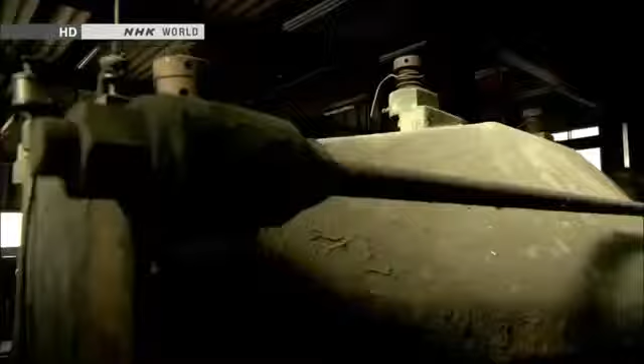In a workshop near Mount Fuji, a curious being has appeared. It's 3.8 meters tall and weighs 4 tons. It is a giant humanoid robot named Kuratas.

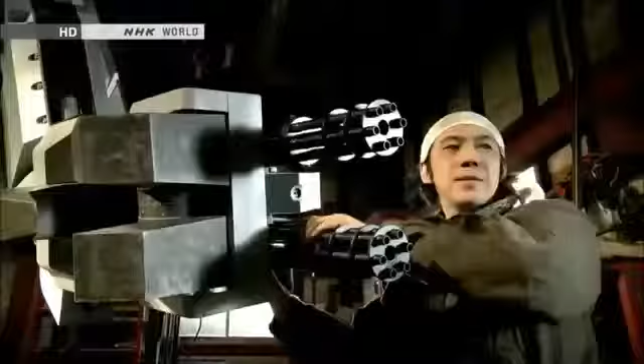Kuratas is a contemporary artist's creation. He holed up here for 2 years, building the robot with input from an expert.

He calls Kuratas a work of art, but it's a sophisticated piece of machinery. A person seated inside can control the robot, move its limbs, and grab things.

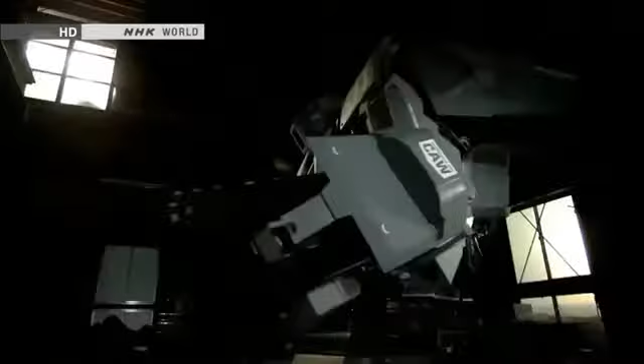The artist says he was inspired by robots in science fiction tales and animation. That vision sustained him as he worked in solitude.

Things that were once unthinkable are becoming real. How will robots evolve? Well, military applications could be one option. They'll probably become more and more like humans. They could surpass us in strength and ability.

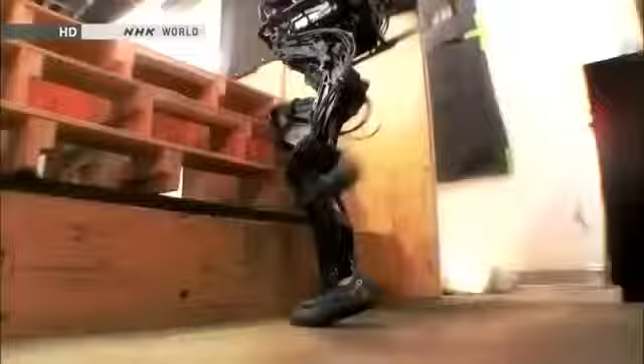People long dreamed of creating these extreme machines. Now, humanoid robots are here. They think like we do, move like we do, and even sacrifice themselves for us.

We want our robot to change society, because robots must be useful. Electronics and computing, progress in vision systems, there's many pieces of it. We will see much more capability continue to grow.

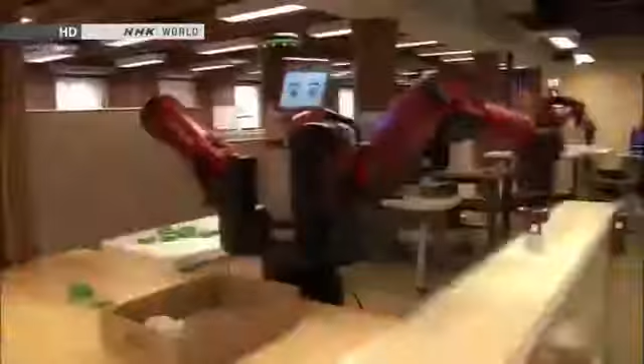Since the Industrial Revolution, people have entrusted some jobs to machines. But there may come a day when humanoid robots do much more complex jobs. Then, what will people do?

You'll see more and more robots doing things in society, whether it's manufacturing or service applications or home healthcare applications. The key will be skillfully dividing labor between humans and humanoid robots.

The disaster that hit Japan in March 2011 accelerated efforts to develop robots with human traits. The Fukushima nuclear accident left people powerless.

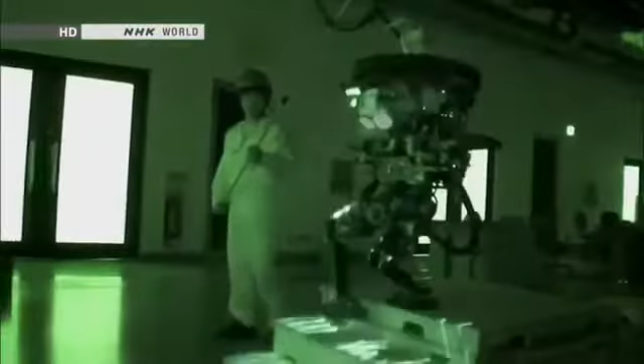Robots can take over when things become dangerous. They can plow through rubble, climb ladders, even make repairs. People are turning to humanoid robots to handle all of these tasks.

We're eager to launch it soon to end the crisis. By joining forces, we can make a truly useful contribution.

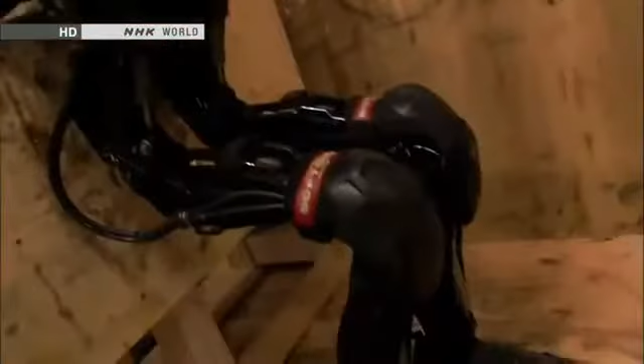Only a humanoid could do it. The day will come when robots will really assist mankind. The nuclear disaster in Japan sparked explosive advances in humanoids at the front line of robotics development.

This program explores the future that's fast approaching.

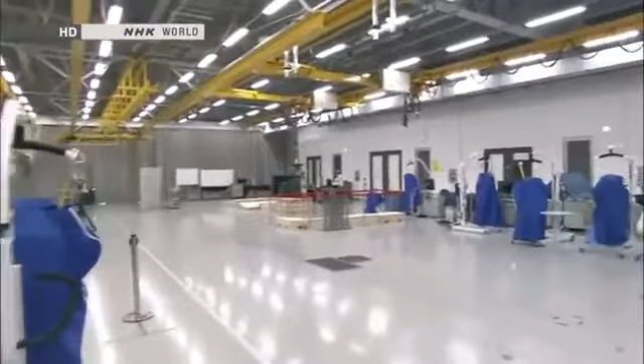Japan is a worldwide leader in the development of humanoid robots. Asimo is the country's crowning achievement. Engineers continue to make improvements.

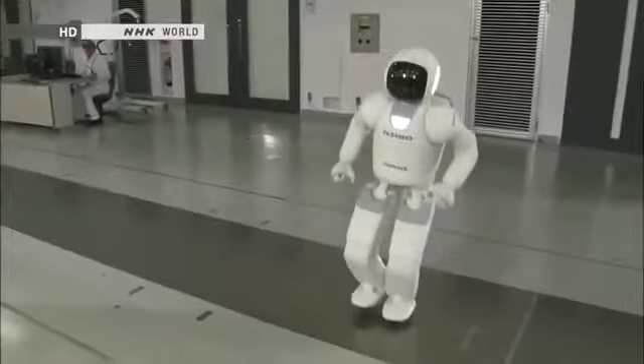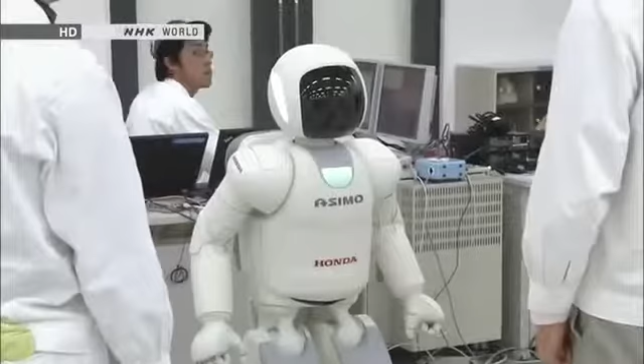Asimo's most innovative feature is its advanced intelligence. The robot can think and act on its own without human intervention. That's made possible by sensors that replicate our 5 senses.

Asimo's head contains 8 microphones. It uses them to listen and engage in conversation.

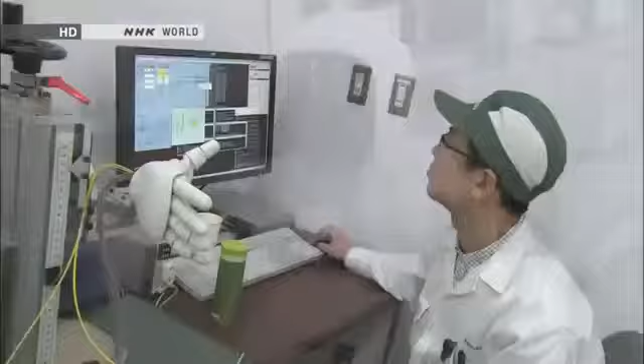Asimo also has a sophisticated sense of touch. Its fingers can make subtle movements, like a person's. Sensors are embedded in the fingertips, too. They can gauge the hardness of an object, like human fingers do.

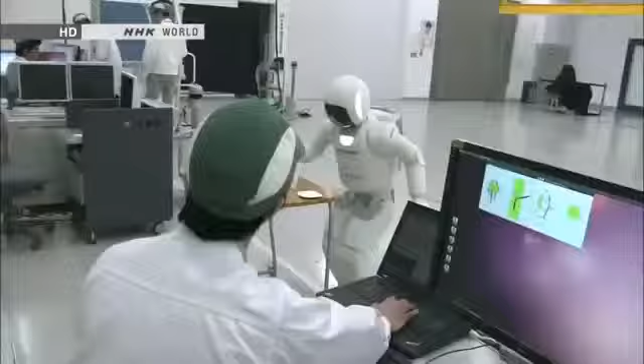Most robots use a fixed amount of strength to grab things. But Asimo exerts more power to open a tightly sealed water bottle and less when holding a paper cup. Its artificial intelligence uses information from the fingertip sensors to adjust the grip.

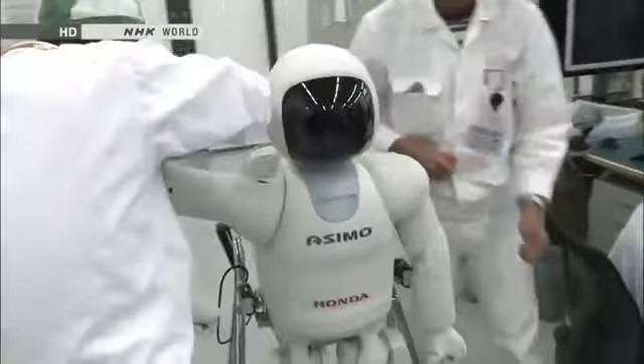The developer's ultimate goal is for Asimo to be a valuable partner that coexists with humans. The engineers who created Asimo all grew up watching animated shows about robots, such as Astro Boy, Doraemon, and Gundam. They dreamed of someday making their own.

Satoshi Shigemi is the development team's leader. He has been designing robots for the past 16 years.

From the beginning, we wanted to design a robot that could help people. To realize that dream, we're constantly asking ourselves, what kind of robot would be able to change society, make people happy, and make life easier for people around the world?

Our idea is to create a robot that will change how people live. We're working through the technological issues, one by one, in order to reach that goal.

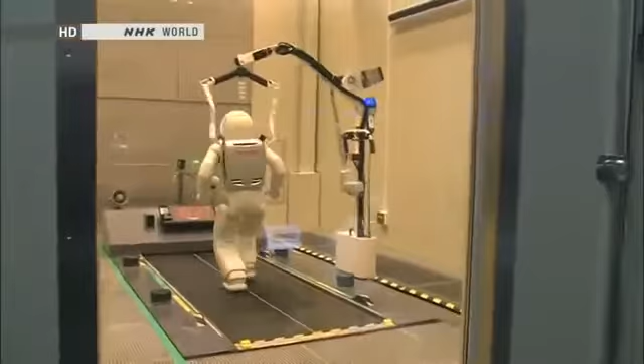Asimo's advanced physical capabilities are revolutionary. The robot can walk and run. It can reach speeds of up to 9 kilometers an hour.

For robots, walking is much easier than running. When running, both feet momentarily leave the ground. Balancing in mid-air is no easy task.

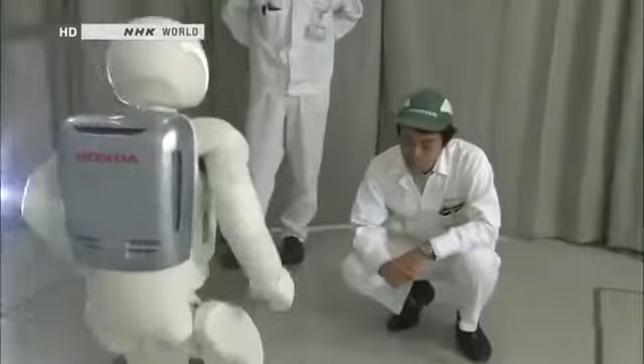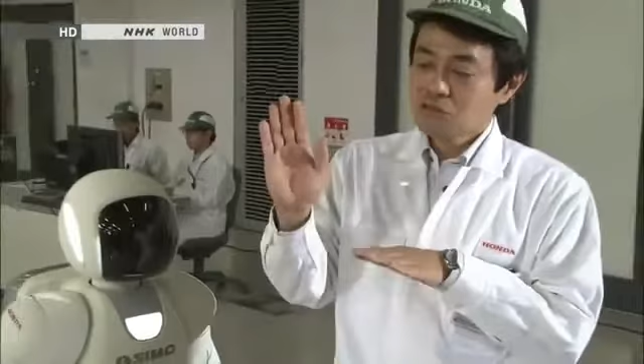Maintaining posture while jumping or floating in the air was a major technological breakthrough. Asimo leans its upper body slightly forward to maintain overall balance, going forward straight in the air. Sensors in Asimo's waist measure the robot's angle, and it leans slightly to compensate, forward or back, side to side. That's how it stays perfectly balanced in the air.

Asimo has been evolving ever since development began in 1986, much like a growing child.

But something happened that made researchers realize Asimo's real-world limitations. It was the accident at Tokyo Electric Power Company's Fukushima Daiichi nuclear plant. The damaged reactors released radioactive substances, making it difficult for humans to deal with the crisis. People needed something that could confront the dangers and bring the plant under control.

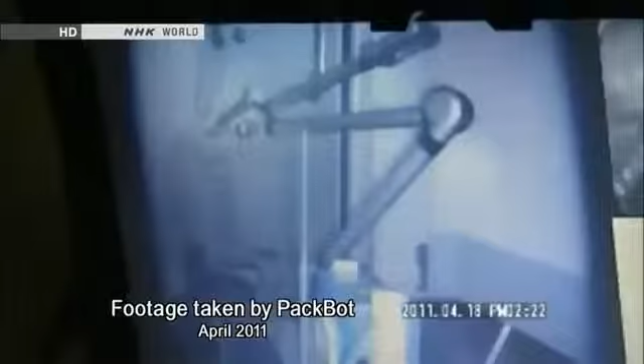Robots. Japanese officials sent a request for robots developed by the U.S. military. The robots were sent to Fukushima in April 2011. They recorded images inside the damaged reactors. Since then, a variety of Japanese robots have been enlisted as well.

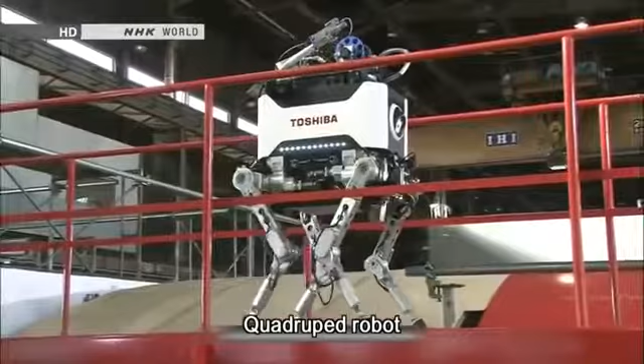Robots have proven to be useful, but 2 years after the accident, they're only used for inspections. They're not able to do all the work of humans.

What about Asimo? Right after the disaster, people flooded Honda with phone calls and emails asking the company to send Asimo to the Fukushima plant. But Asimo wasn't up to the task. It could move nimbly over an office floor and other flat surfaces, but large vertical gaps and obstacles were a different story.

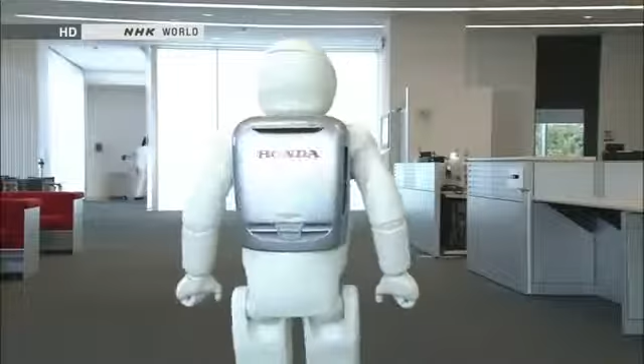We heard from many customers. We ourselves regretted that Asimo couldn't be of help. It was obvious that the Asimo we had built wasn't ready for real-life action. We realized right away that we needed to make something different, something new that could offer immediate assistance.

Honda wasted no time. Company officials offered to create a robot free of charge to assist TEPCO in the recovery. TEPCO accepted. Officials asked for a robot that could open or close valves inside the nuclear plant.

We wanted to flush out radioactive materials that remained inside the pipes and bring down radiation levels in the facility. That was our first goal. Unless we opened or closed the valves, the area would remain highly radioactive, and that would prevent workers from entering the facility and impact the entire decommissioning schedule.

How many valves are there? Each unit has from several thousand to tens of thousands of them.

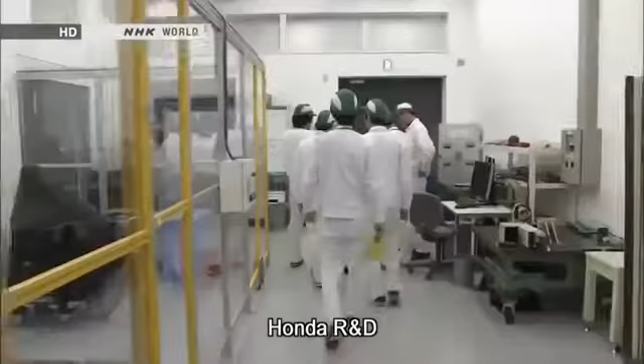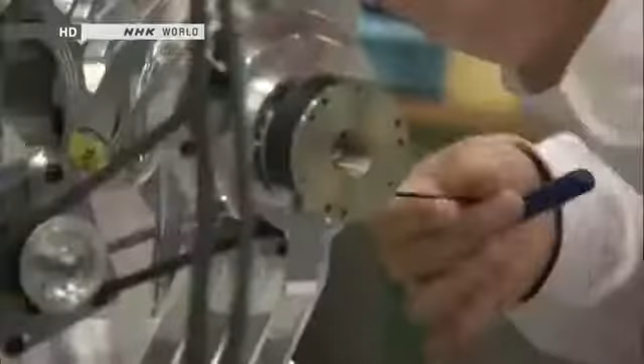In July 2011, 4 months after the accident, Honda began designing a robot for use at the nuclear plant. Members of the Asimo team were put in charge of the project. A humanoid robot would take too long to build, so engineers focused on making a robot specifically for operating valves.

Asimo was crucial to their efforts. Its ankles employ advanced balancing technology. Developers reasoned that using it would allow the new robot to work inside rubble-filled reactor buildings.

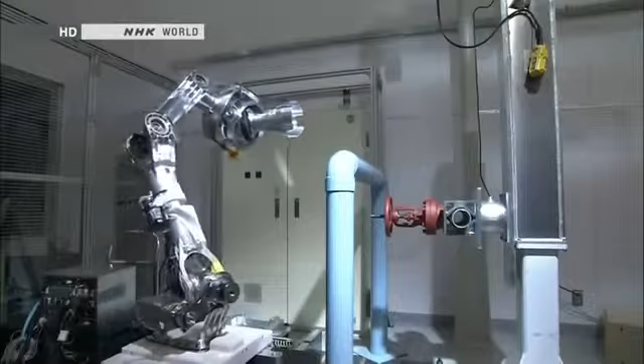The team worked exceptionally fast, completing a prototype in just 4 months. They turned Asimo's leg into an arm for operating the valves. Even when the base moves, the arm remains steady.

So far, so good. Officials from TEPCO evaluated the prototype at the National Institute of Advanced Industrial Science and Technology. The government-backed group for cutting-edge research contributed to the development effort.

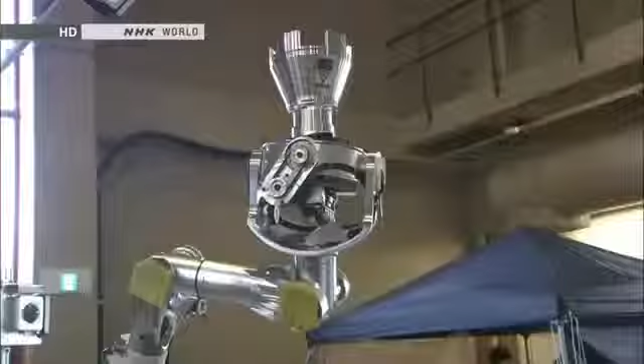A TEPCO official couldn't take his eyes off the robot's movements. We may be quite demanding. That's okay. We might be quite direct. The test is designed to replicate conditions inside the nuclear plant.

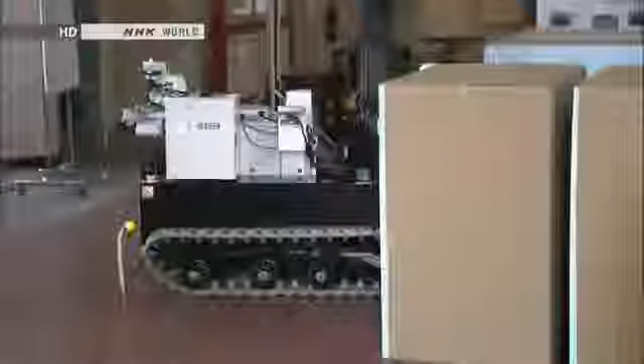The robotic arm is remote controlled. Testers send the arm toward one of the valves. There are a number of unknowns, including the condition of the valves. They may have rusted since the accident. A valve might break if the robot applies too much force, or it might not budge at all.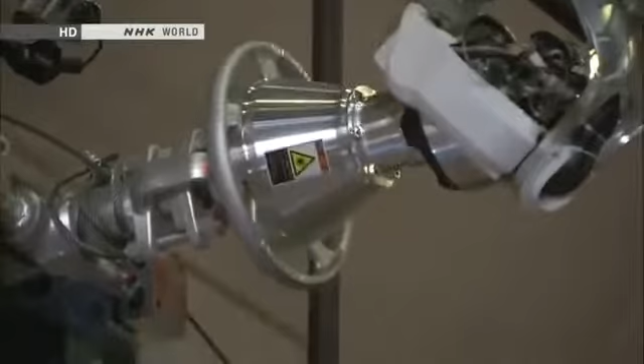The robot uses just the right amount of force and turns the valve on the first try. It's passed the test. This robot can do more than inspections. It could help in the recovery effort.

From what we've seen, the robot seems near perfect. We want to use it as soon as the need arises. It's important that we quickly do what we can to make that possible.

The Fukushima accident also encouraged U.S. developers to design emergency response robots. Department of Defense officials have spearheaded the effort. Before, they had shown little interest in humanoid robots. Now, they view them as vital for disaster response.

The architect of the new strategy is Gill Pratt of DARPA. He oversees funding for leading-edge research at the Department of Defense.

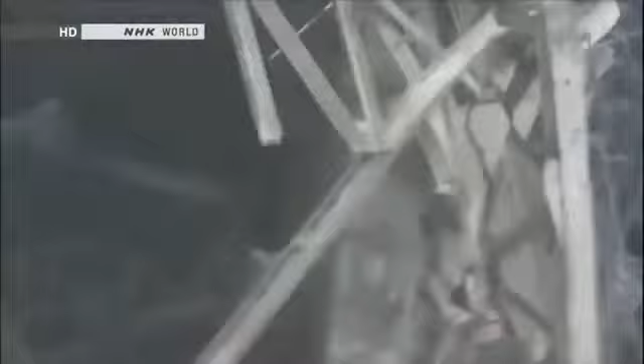There are many aspects of disaster response in Fukushima that inspire people in robotics to work on new capabilities. If they were able to take action during those first 24 hours, then the first reactor maybe would not have blown up, in an environment that is too dangerous for a person to do. What's important to us is that the robot is compatible with human environments, compatible with human tools, and also compatible with human operators without special training.

As a result of that, the easiest form that comes to mind is the human form. DARPA is backing the development of a humanoid robot for catastrophes, such as nuclear power plant accidents.

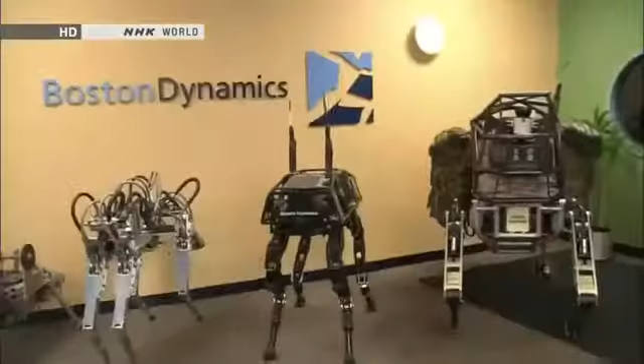This company is leading the development work. It has already built several military robots. Okay, I'll show you the current status of the robot.

This is the first American-made humanoid robot for disaster response. It's called Atlas. Before, U.S. designers had focused on robots with specialized functions.

Why the sudden interest in humanoid robots? Traveling over debris, prying open valves, using tools for repairs—performing multiple tasks like these is impossible for specialized robots. Crises also require robots that can navigate doors and stairs. Humanoid robots are ideally suited for such situations.

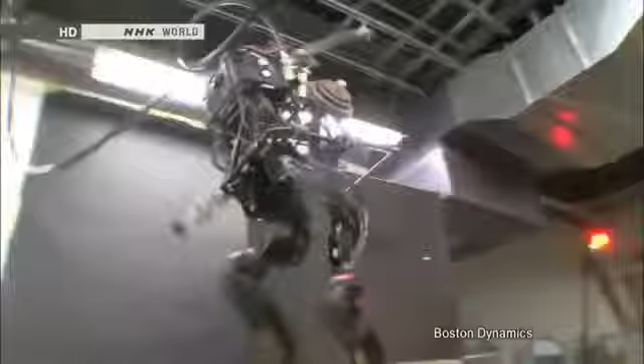Tests of this prototype were going smoothly. It can easily climb stairs and jump from a height of nearly a meter. It can negotiate obstacles using its arms and legs. It can already handle more demanding environments than Asimo can.

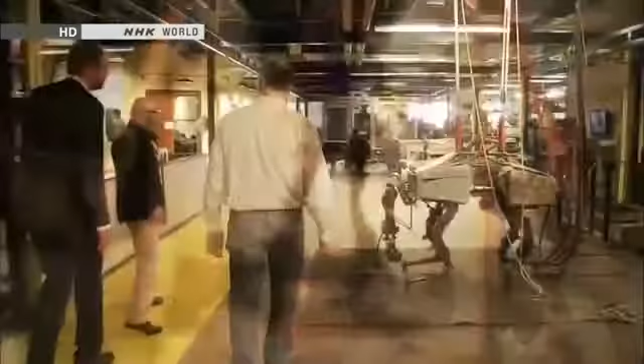Atlas is loaded with technologies originally designed for military robots. A quadruped robot called Cheetah can race through a battlefield at 50 kilometers an hour. LS-3 is for transport—it can carry heavy supplies for soldiers.

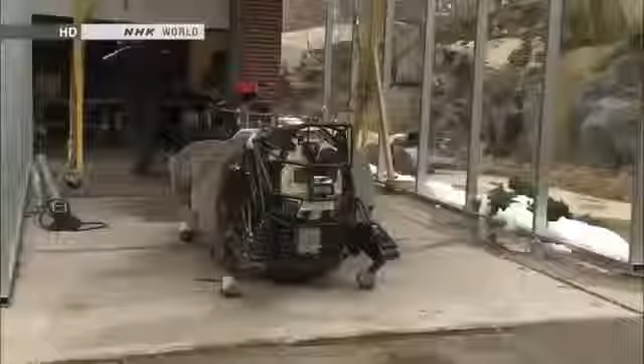The ferocious-looking robot gets its strength from a powerful hydraulic drive system. A hydraulic device can be small, yet quite strong. The black cables convey hydraulic power to the legs, generating the brute force required for harsh conditions on the battlefield.

A web of hydraulic cables covers Atlas's body. They form a muscular suit of armor for clearing debris.

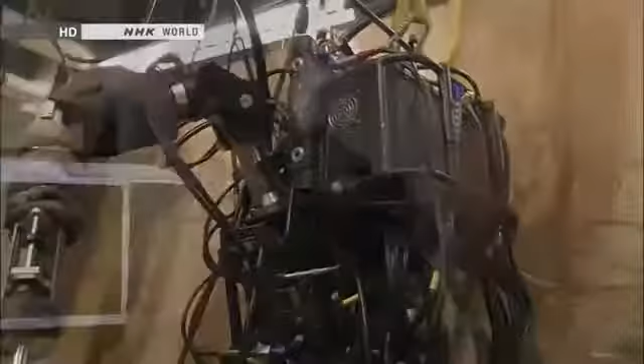Another important technology comes from military robot engineering. This machine's joints have a wide range of motion, allowing for flexibility that humans can't achieve. Atlas's joints are capable of moving in 28 different ways. Atlas can crawl through narrow spaces and withstand sudden shocks.

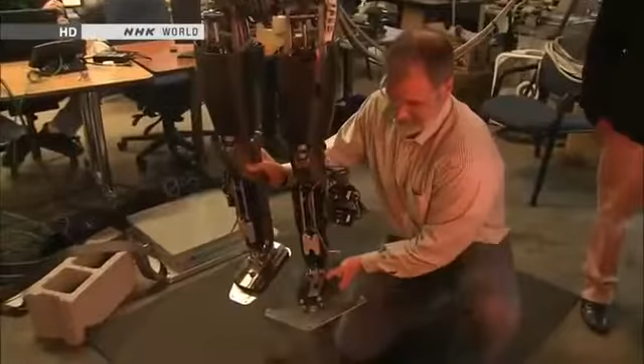But then we have the knee—this has 3 in the hip, just like us. This way, and then this way. I am very impressed with the number of degrees of freedom. It will be able to do these human-compatible tasks without a lot of the limitations that other robots have.

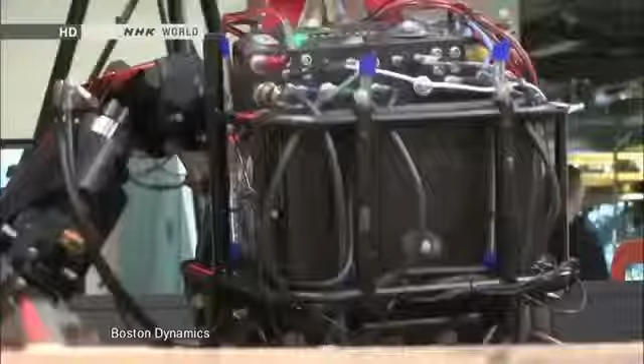Engineers will combine Atlas's rugged body with sophisticated artificial intelligence that's almost near completion. They aim to complete the robot by December of next year.

One reason you see humanoid robots is because there are some people working who are really interested in robots as an entertainment thing or as a performance thing. I think that's different. We're much more interested in basic capabilities for emergency response, rescue. So I don't think Asimo has been designed to do those things yet.

U.S. engineers stepped up their efforts to develop humanoid robots after the nuclear accident in Japan. Japanese researchers are embracing the same mission.

In November 2012, robot engineers from around the world gathered in Osaka for an international conference on humanoids. Gill Pratt from DARPA was one of the participants.

He came to invite engineers to join a project sponsored by the U.S. Defense Department. On March 11th, after 24 hours, if only a robot had been there to go and open that valve, the entire disaster could have been averted. But we didn't have one, and furthermore, we didn't have anyone that could do the job. So shortly afterwards, we actually started planning the DARPA Robotics Challenge.

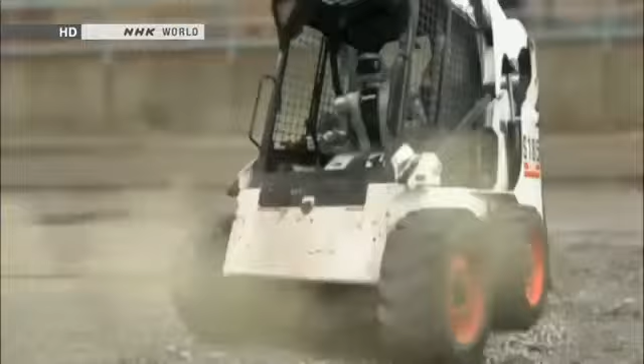The challenge consists of 8 tasks: driving a vehicle to approach a disaster site, walking over rubble, removing obstacles, opening doors, using tools to break down walls, climbing ladders, turning valves, and making repairs.

A single robot must complete all 8 tasks. The development period is 2 years. DARPA will provide contestants with funding of up to $4 million.

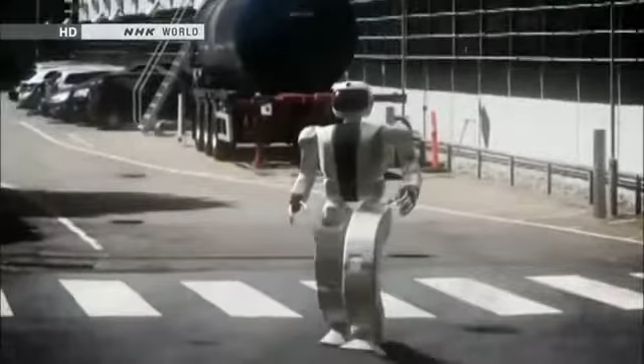DARPA has received over 100 proposals from research groups worldwide. They include renowned organizations like NASA and MIT. Japan is at the forefront of humanoid robotics engineering, yet its researchers hesitated to throw their hats into the ring.

So actually, to me, it's difficult not to see that some of the results of DRC are going to be used to advance, as you say, advanced military technology. The DRC is about developing robots that I believe wholeheartedly are completely impractical for military purposes, for offensive military purposes.

Will the technology that we come up with find its way into military systems? Probably yes. But I guarantee you that if you work on a robot for healthcare, there's a chance that that technology will also find its way into military systems.

The members of one Japanese research institution wanted to take part in the competition.

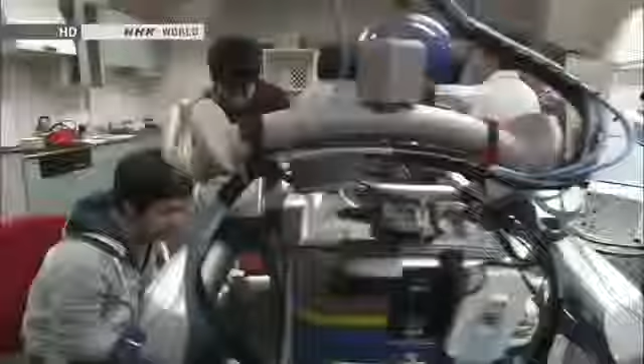They worked at the University of Tokyo's robotics lab. Researchers there, along with those at Honda, are global leaders in robotics engineering. But they faced a major obstacle to competing: the university bans military-funded research.

Three researchers made a decision. They told the university they were leaving. Then they decided to set up a venture company and enter the DARPA Robotics Challenge.

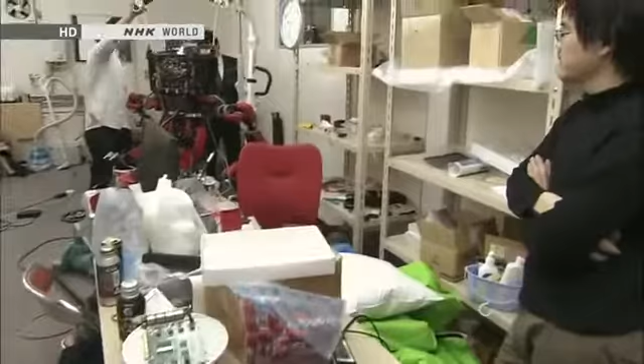They couldn't shake the feeling that they should leave their quiet university lab and help resolve the nuclear crisis.

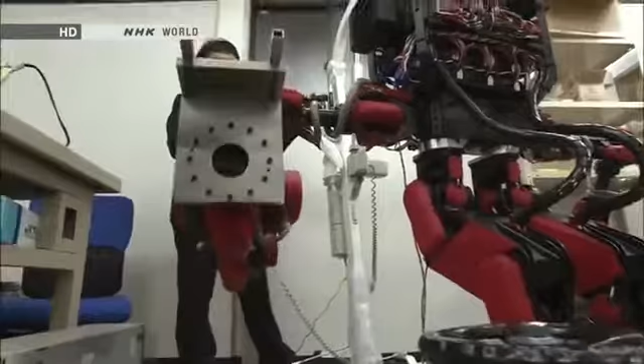Six months after launching their venture, the team had just completed a prototype with help from university graduates. Its long arms can exert 10 times more force than those of conventional humanoid robots.

It's too tight to turn with one hand. But it can easily turn a valve that's too tight for a person to turn.

The strong force comes from a large electric current that pushes the motors to their maximum limits.

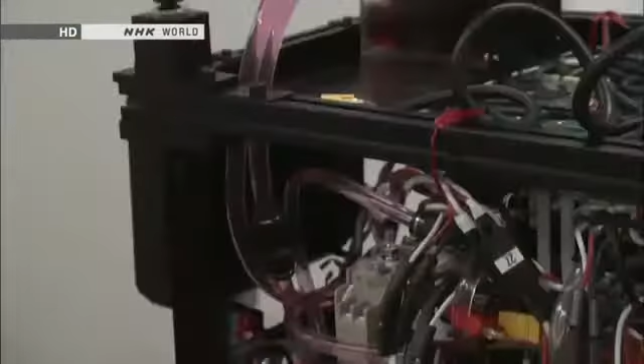A reddish fluid circulates through the robot's body. The fluid serves as a coolant that keeps the motors from overheating. This cooling system should enable the robot to perform hours of grueling work at disaster sites.

The time has now come for the developers to apply their years of research to the real world. A nuclear crisis has happened here in Japan. Radiation is escaping. Researchers in every field must wonder at least once if the technology they've been working on could help resolve the crisis. By joining forces, we can make a truly useful contribution. It's with this in mind that we decided to enter the competition.

One country is quickly catching up with Japan in humanoid robotics: South Korea. KAIST is a government-funded lab for the advancement of science and technology. Researchers there were among the first to express interest in DARPA's robotics challenge.

This humanoid robot is called Hubo. It's modeled on Asimo, which Honda spent 14 years developing. Hubo was built in just 5 years.

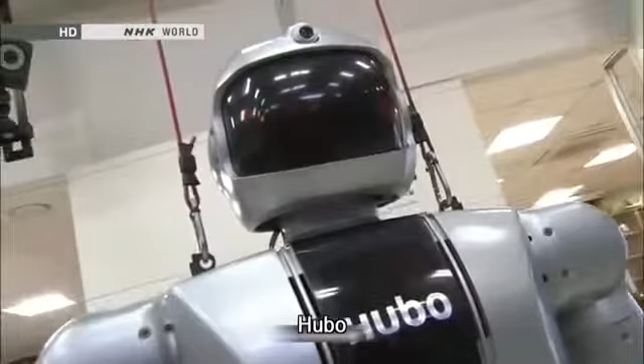Hubo deftly manipulates its hands, and it's also good at dancing. Its moves look just like Asimo's.

Hubo has been undergoing a major upgrade ahead of the competition. It can now bend backward at the waist while walking to handle all kinds of environments. It can quickly pick up tools. The tests were going well.

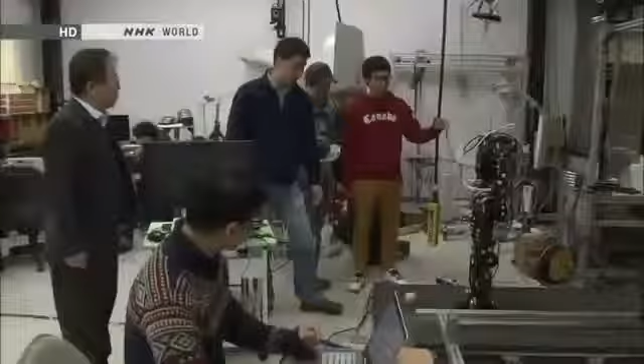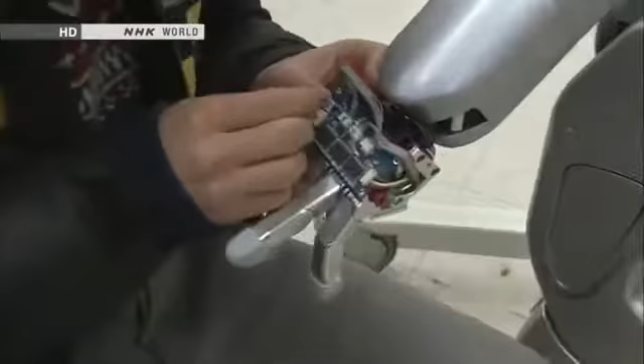People have always compared Hubo to Asimo. Engineers now had a strategy to get ahead of the Japanese developers. They decided to publish certain details about Hubo's design and pursue joint development with researchers at other institutions. One could say that this space inside Hubo's chest captures the heart of their thinking.

It's empty now, but this is where artificial intelligence will be installed. It's removable. Hubo does not yet possess artificial intelligence. Its motions are as sophisticated as Asimo's, but Hubo's movements are all pre-programmed.

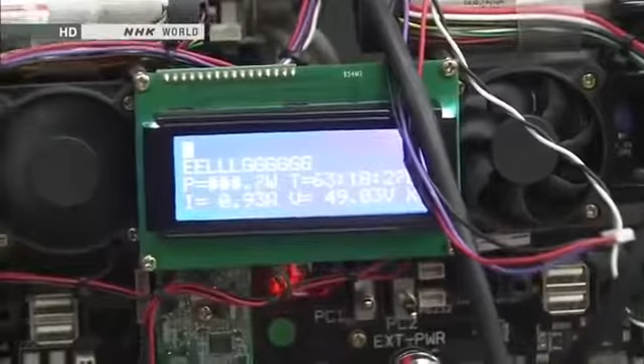U.S. universities that lead research into artificial intelligence will develop a brain for Hubo. The stage has been set for a joint U.S.-South Korean team to compete in the DARPA Robotics Challenge.

Sharing is the key to making technological advancements. That's true in South Korea and in other places too. Research shouldn't be confined to one place. People developing humanoid robots elsewhere are too close-minded.

Researchers at Honda were also invited to enter DARPA's competition, but they declined. Their energies were focused on designing a robot to tackle Japan's nuclear crisis.

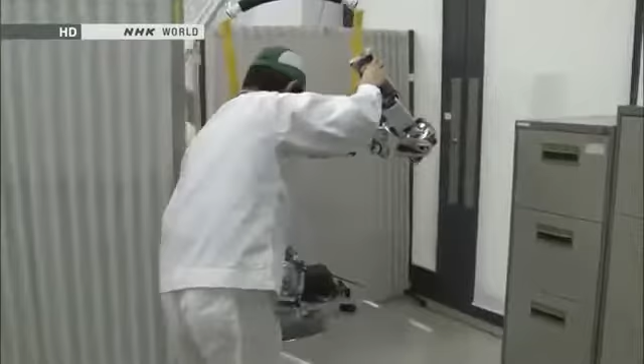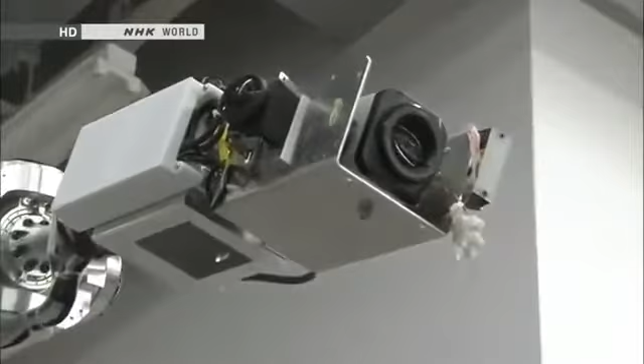Nearly a year has passed since Honda's robotic arm passed evaluation tests, but the device has yet to be deployed to the nuclear disaster site. That's because officials at TEPCO requested a change in specifications. Engineers have replaced the valve-turning hand at the end of the arm with a camera.

TEPCO had changed its plan. Officials decided to put priority on assessing conditions inside the plant's facilities. They said it was too early to have robots work on valves.

There wasn't even a recovery plan in place when we were working out the valve manipulation tasks. Confusion also prevailed at the site. We were expecting valve work to begin 2 to 3 years after the disaster, but the timing has ended up being later than what we'd assumed 1 month into the crisis.

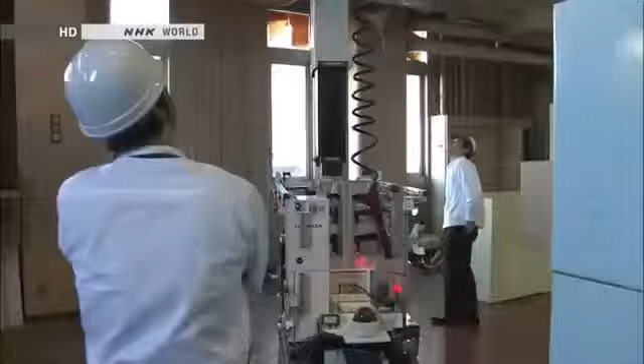The robotic arm will soon be sent to the accident site. It will provide the first images filmed from high up.

The robotic arm was not the end of Honda's efforts. Its engineers had another secret mission.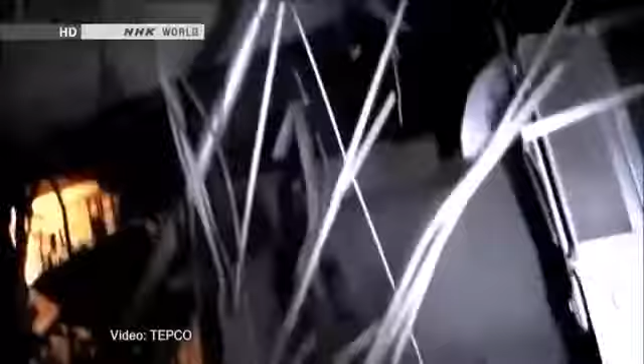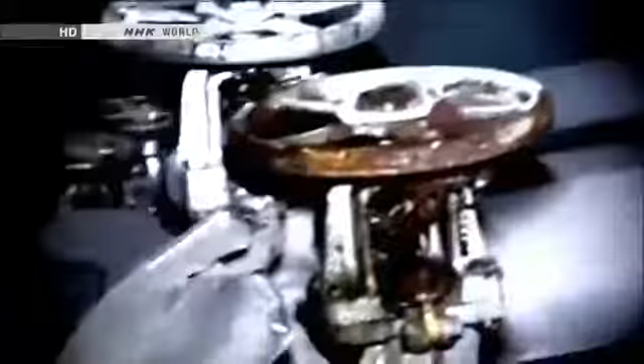They would develop a new humanoid robot, an updated version of Asimo for use in disasters. The site where the Fukushima disaster took place is dark and off-limits to humans. Only a humanoid robot with both intelligence and motor skills could climb over the debris, get to the accident site, and perform the work of people. In other words, a robot like Asimo. Let's use our skills to make a humanoid robot that can tackle disasters.

Asimo's engineers were united by this idea. The robot they envisioned would not only walk, but also use its arms to crawl. It would use every means possible to reach its destination. A dramatic update would be necessary.

A disaster reduction robot would be useless if it couldn't get to the site. It's important to get to the scene no matter what. Disasters create all kinds of debris that crumbles easily or breaks when stepped on. It's because it's dangerous that robots replace humans. That's what makes them valuable. A robot that couldn't get to the scene would be totally useless.

Honda's engineers began developing robots in 1986 with the goal of making people happy. 27 years of research is now being put to the test. As we saw in the Fukushima Daiichi crisis, the bottom line is that robots can stand in for humans in places that we can't go to or that are too dangerous. I am committed to delivering what's needed, when needed, in the shortest amount of time.

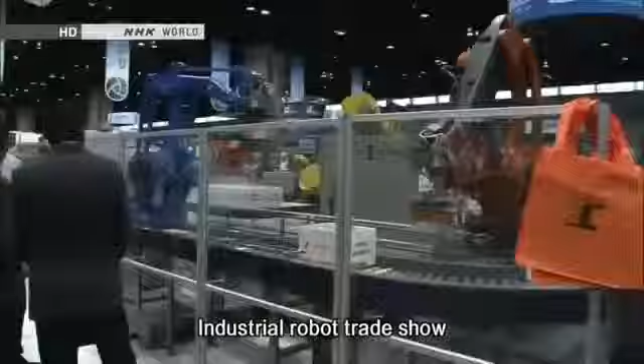One of the largest trade fairs featuring industrial robots took place in January. Global manufacturers displayed their latest models. Companies are developing more and more two-armed humanoids for industrial use.

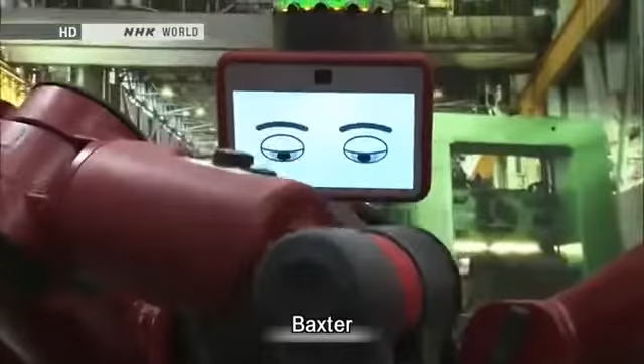One new product at the event caught a lot of people's attention. Baxter was created by the inventor of a best-selling cleaning robot. It's equipped with sophisticated artificial intelligence. Baxter is designed to work side by side with people in factories and other settings.

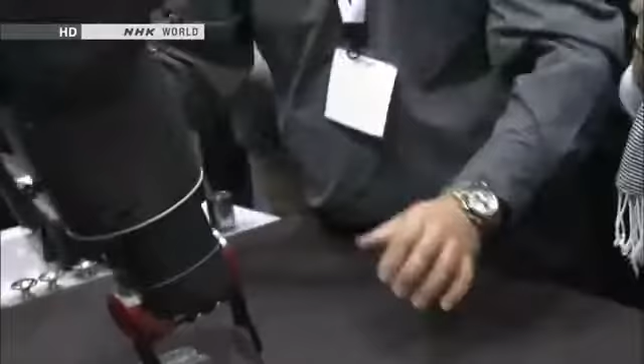The robot's most unusual feature is its ability to master a task in a matter of 5 minutes. All that's required is step-by-step manual instruction. No complicated programming is needed.

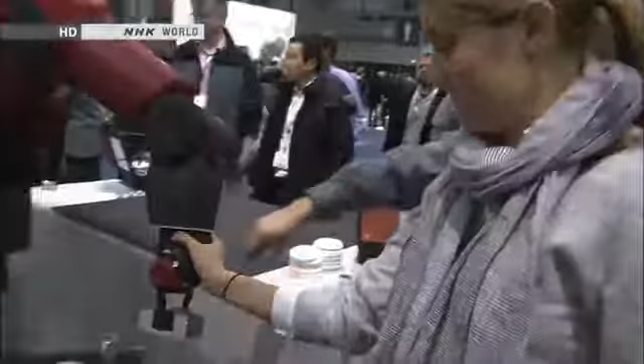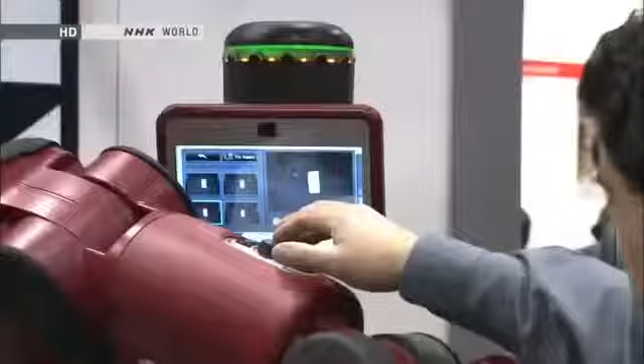The expression of the face on the LCD screen shows whether or not the robot has understood the task.

Baxter costs $22,000, a bargain for a humanoid robot. The maker says buyers can recoup their investment in several months and slash labor costs.

I'm very impressed with it. I work for a small manufacturing company, and we have some older employees who are looking to retire, and there's some tasks that Baxter could do for us very effectively. Plus, it would be cheaper than employing a person. It's not going to get tired, it's not going to need to stop, it'll keep running while everybody else is taking their lunch.

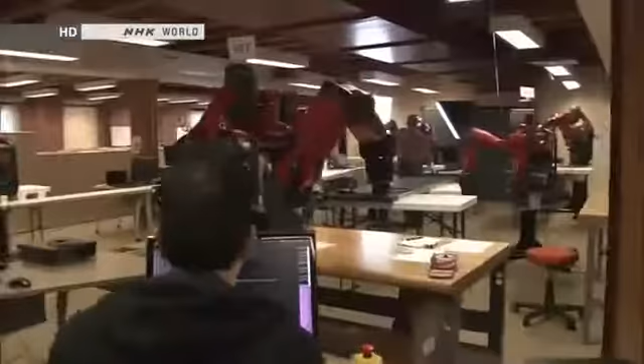The Boston-based manufacturer has a flood of back orders. Officials say someday Baxter will work at places like coffee shops, taking orders and grilling burgers. Eventually, they expect to have 500,000 U.S. customers.

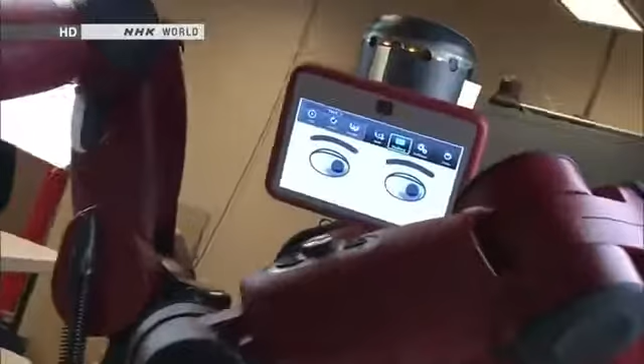Today we're focused on manufacturing, and there's a very big opportunity in manufacturing, but there's lots of other places that a robot like Baxter could go. We had the Industrial Revolution at the turn of the last century. We've just gone through the computer revolution, effectively at the turn of the most recent end of the century. We are now into the robot revolution.

Will people and robots someday compete for jobs?

At 8:30 one morning, a group of new employees takes part in daily morning exercises. They are 13 humanoid workers called NEXTAGE. This company began using the robots in earnest last year.

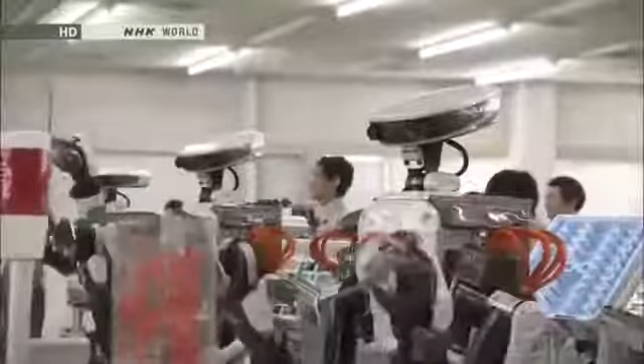They have 2 eyes and are just like humans. They're cute!

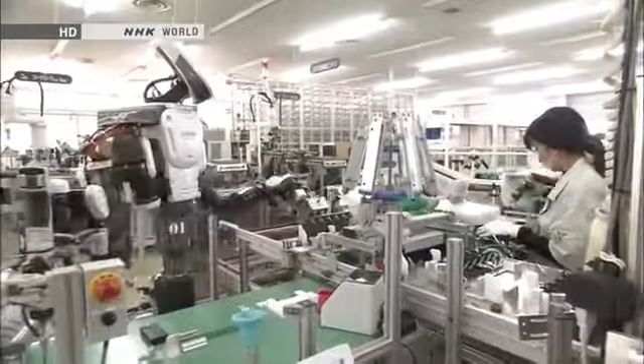This factory manufactures money sorting machines for cash registers. The humanoids work on a production line that was previously manned entirely by humans. The robot visually confirms the parts set in place by a human worker, then it begins its task.